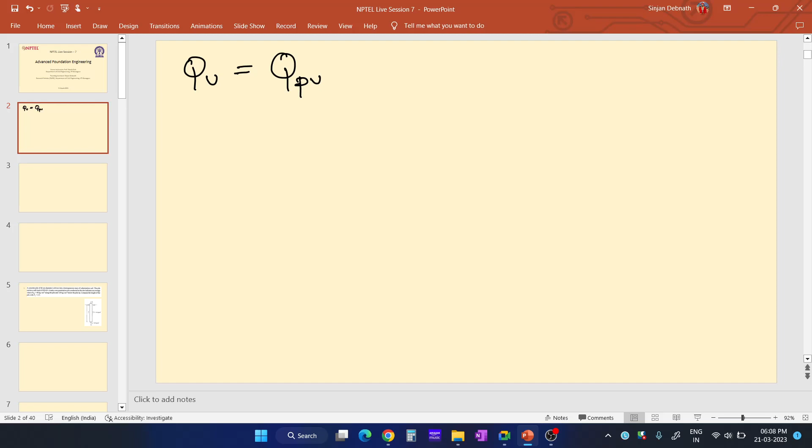So let me go through the concepts that I discussed in the last session, just to refresh your memory. The pile load carrying capacity of the pile, or the ultimate load that the pile can carry, is equal to the end bearing resistance plus the skin friction resistance. This I discussed in the last class, and I solved some problems regarding this concept.

So based upon this concept, what is QPU? It is the end bearing resistance, and QF is the skin friction resistance. QPU is equal to the unit end bearing resistance multiplied by the cross sectional area of the base of the pile, because the end bearing acts at the base of the pile. QF is the total skin friction resistance, which is fs, the unit skin friction resistance acting along the surface of the pile, multiplied by As, the surface area of the pile.

So for cohesive soil, Fs is equal to alpha into C dash. Alpha is the adhesion factor, and C dash is the cohesion of the soil layer along the length of the pile. Suppose this is your pile, this is layer 1, and this is layer 2, with their respective cohesions. This cohesion is the cohesion of that layer along the length of the pile, and this one is Fs.

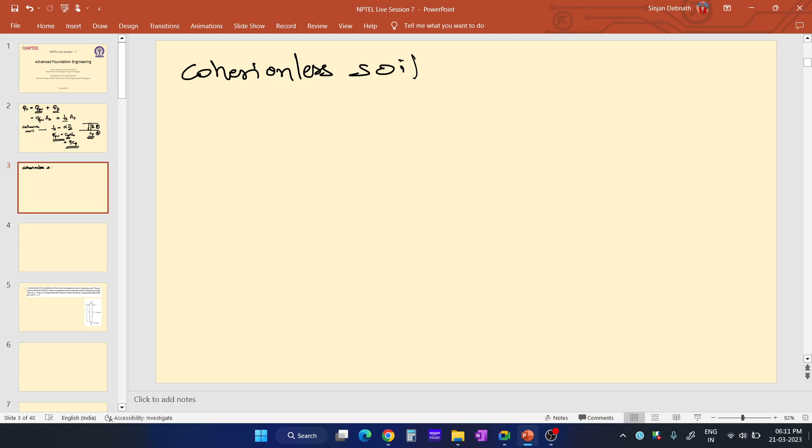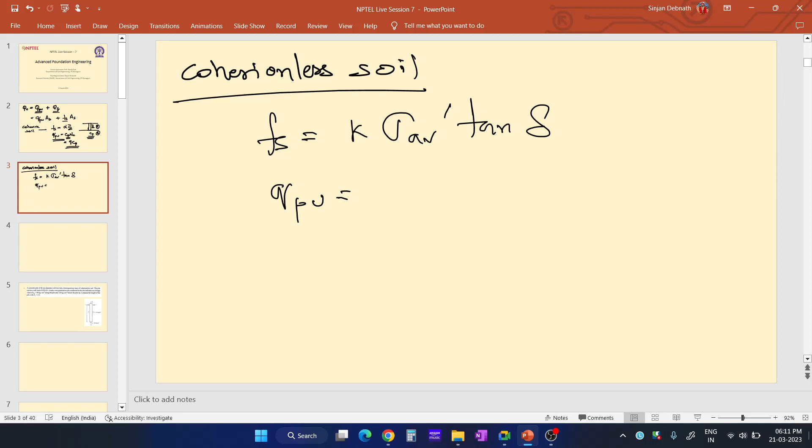And for cohesionless soil, Fs, the unit skin friction resistance, is equal to K into sigma Av dash tan delta. I discussed all this in the last class. And QPU, the unit end bearing resistance, is equal to sigma dash into NQ, where NQ is the bearing capacity factor, and this value should always be less than 11,000 kPa.

Okay, so this is it. Now we may move to the first question. So what is the first question? So the first question is...

A concrete pile of 40 centimeter diameter, as shown in the diagram. The diameter is 40 centimeter. Let me write down all the information given: the pile is driven into a homogeneous mass of cohesionless soil.

The pile carries a safe load of 650 kilonewton. A static cone penetration test conducted at the site indicates an average value of QC of 40 kg per centimeter squared along the pile length, and 120 kg per centimeter squared below the pile tip. So the value of QC is 120 kg per centimeter square at the tip, and QC along the length of the pile is 40 kg per centimeter square.

Compute the length of the pile with factor of safety 2.5. Okay, so we have been asked to find out the length of the pile.

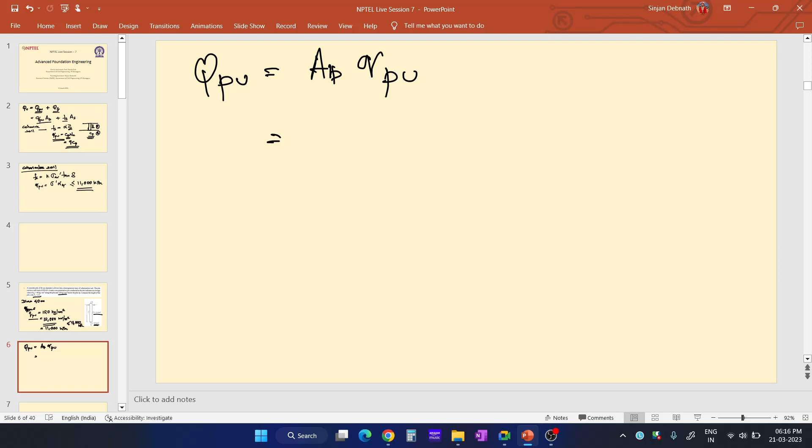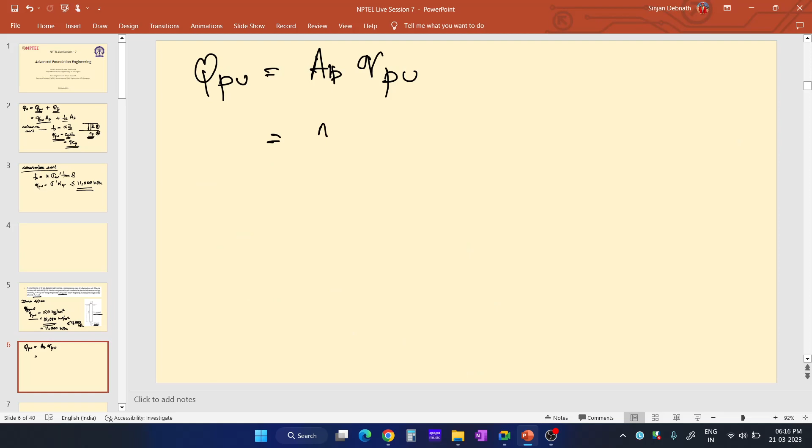We know the diameter of the pile, which is 40 centimeter. So that means the area is pi by 4 into d square, that is 0.4 square, into 11,000.

So small QPU is the unit end bearing resistance, which is 11,000 kPa, and the cross sectional area of the base of the pile is pi by 4 into d square, where d is 0.4. If you calculate this, QPU comes out to be 1382 kilonewton.

Now we have been asked to find out the length of the pile. We don't know the length of the pile; we only know the safe load that the pile is carrying and the factor of safety. So now let us consider the length of the pile to be L.

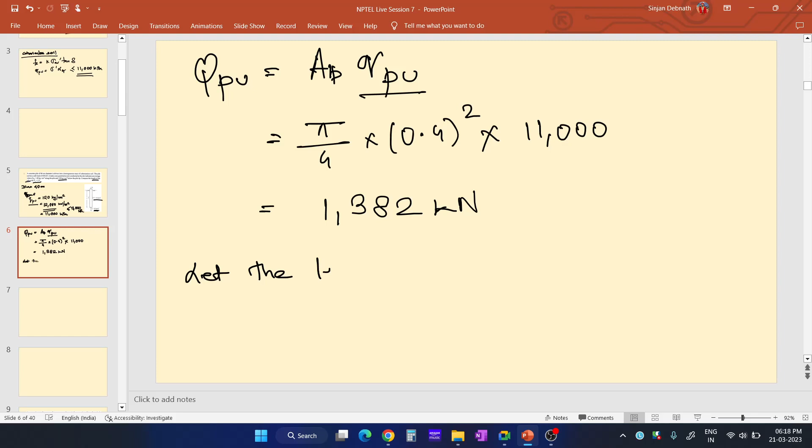Let the length of the pile be L. We don't know the length of the pile, so let us consider it to be capital L. We have found out the total end bearing resistance, and the load carrying capacity of the pile is equal to the summation of total end bearing resistance and total skin friction. So now let us find out the skin friction.

So that is, what is skin friction?

QF, capital QF, is equal to Fs into As. Fs means the unit skin friction resistance, and As is the surface area of the pile. Now let's find Fs.

We know the average value of cone-tip resistance along the length of the pile. The average cone-tip resistance is 40 kg per centimeter square. So Fs will be equal to 40 kg per centimeter square. Now let us convert this value.

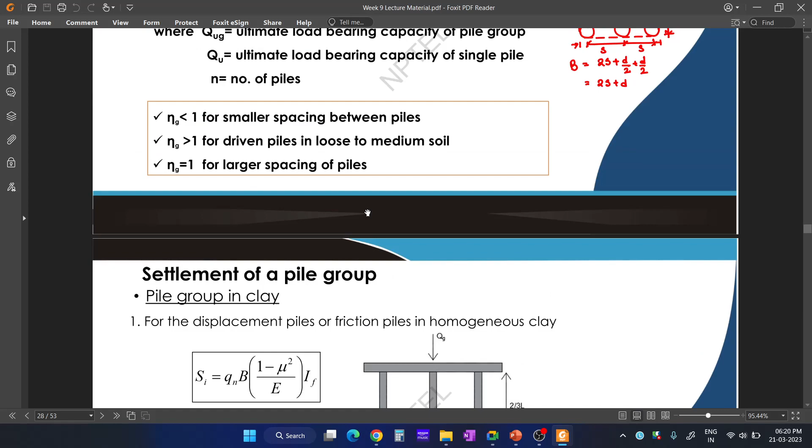Let me refer to a slide. Please wait for a minute.

QF, the total skin friction resistance, is the unit skin friction resistance multiplied by the surface area of the pile. Now, Fs is not exactly 40 kg per centimeter square. Let me explain why. Using QC, for the base, QPU is 120 kg per centimeter square. There is nothing wrong there.

But when finding Fs, the unit skin friction resistance, we need to consider certain things. The average value of QC is 40 kg per centimeter square along the length of the pile, that is, the average cone-tip resistance along the length of the pile.

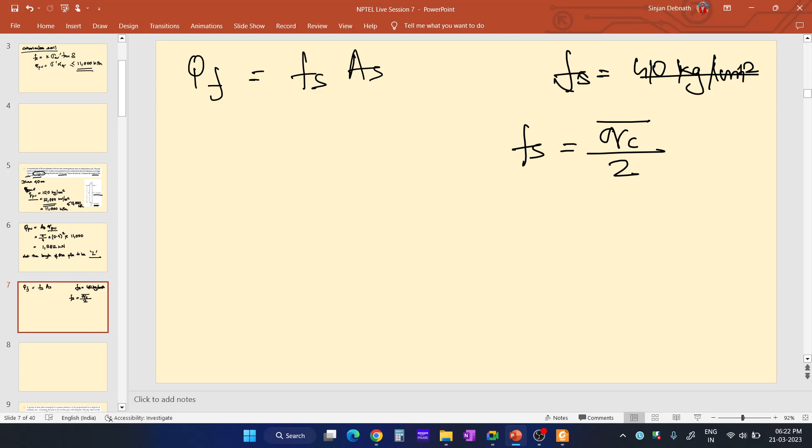Now for a displacement pile, it is mentioned in the lecture that Fs, the unit skin friction resistance, is equal to QC by 2. This QC is the average QC, which is given in the question as 40 kg per centimeter square.

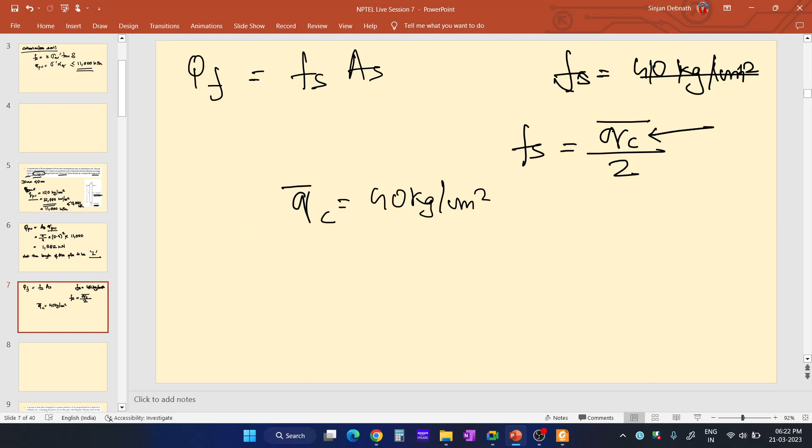The average QC is 40 kg per centimeter square, and the unit of QC is kg per centimeter square. But after calculating, the value you get will be in kilonewton per meter square, or kPa. So QC, 40 kg per centimeter square, divided by 2, gives 20 kPa, that is 20 kilonewton per meter square.

This is an empirical equation. You must not do this for the end bearing resistance. For unit end bearing resistance, QPU is equal to QC, and the unit is also the same, which is why I transformed the unit from kg per centimeter square to kilonewton per meter square. But that is not the case for QF.

Please, while solving such problems, mind this: for Fs, in case of skin friction resistance, Fs equals QC, the average cone-tip resistance, divided by 2. This QC is in kg per centimeter square, and after calculating QC by 2, the resulting value is in kilonewton per meter square. So the value of Fs is 20 kilonewton per meter square. I hope you have understood.

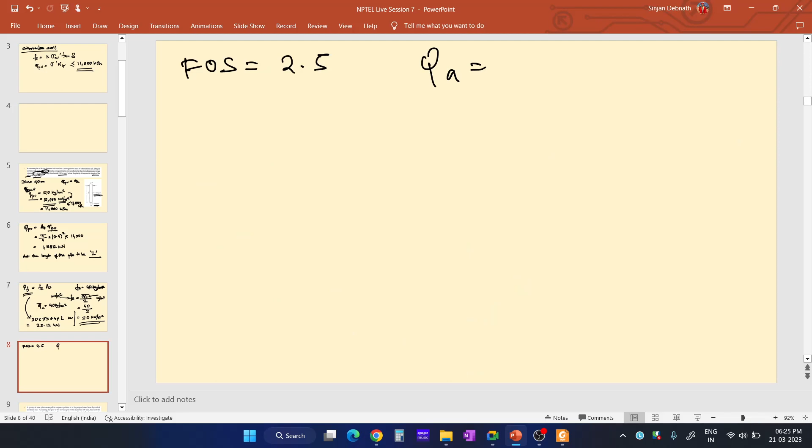Now you know the safe load of the pile is 650 kilonewton, and you also know the factor of safety of the pile, which is 2.5. So factor of safety equals 2.5, and QA, the safe or allowable load, is 650 kilonewton.

So what is the ultimate load that the pile can carry? It is QA into factor of safety, that is 650 multiplied by 2.5. This is the maximum load that the pile can carry.

This one comes out to be 1625 kilonewton. So 1625 kilonewton is the maximum load that this pile can carry. So this one is the maximum load that the pile can carry. Okay, QU, so you know the value of QU.

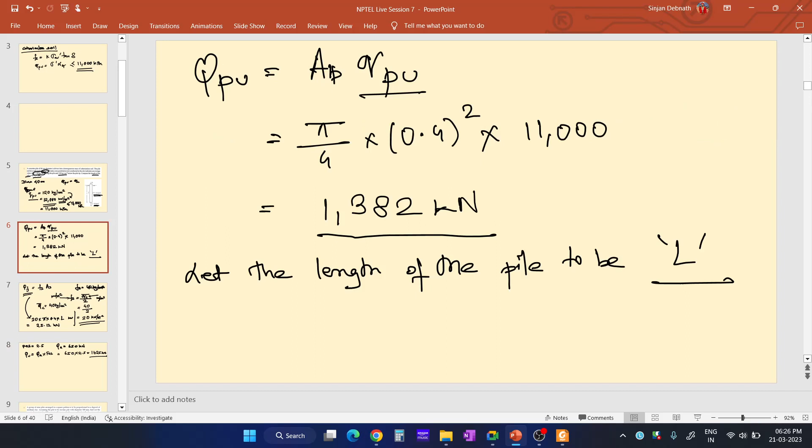You also know the end bearing resistance, total end bearing resistance, that is 1382, and the skin friction resistance, that is 25.12 L. So we can say this QU, the ultimate load or the load carrying capacity of the pile, is equal to the end bearing resistance, that is 1382, plus the total skin friction resistance, that is 25.12 L.

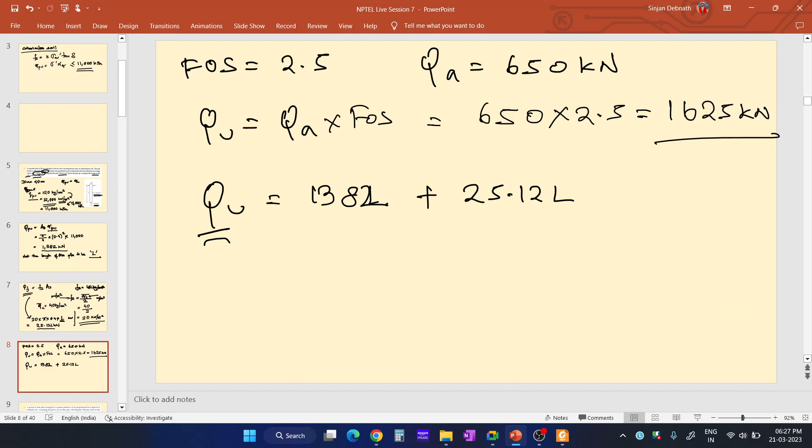And this Q is also equal to 1625 kilonewton. So now let us equate both the things. 1382 plus 25.12 L is equal to 1625 kilonewton. Now if you solve this equation, you will get the value of L to be 10 meter. So this is the answer.

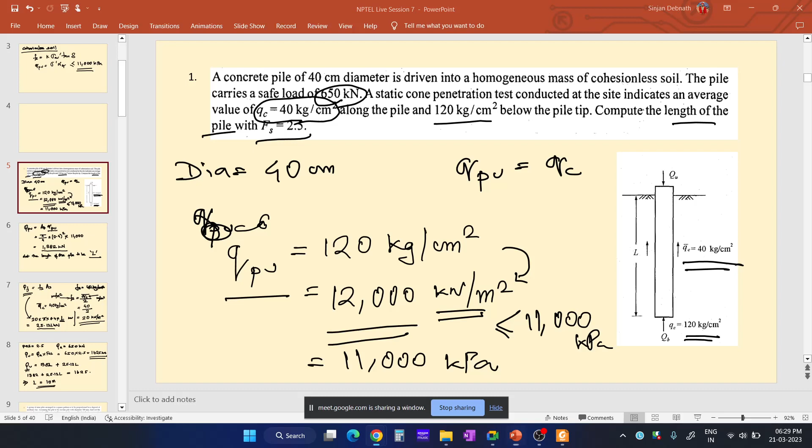Hello, okay, third slide. So are you talking about this slide? So please let me know the doubt. I can't hear you actually. Please... oh, this one, something is wrong over here. Please write your doubt in the chat box.

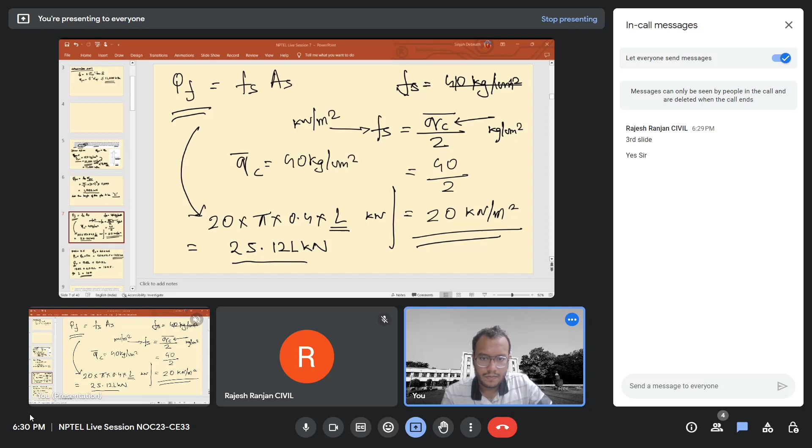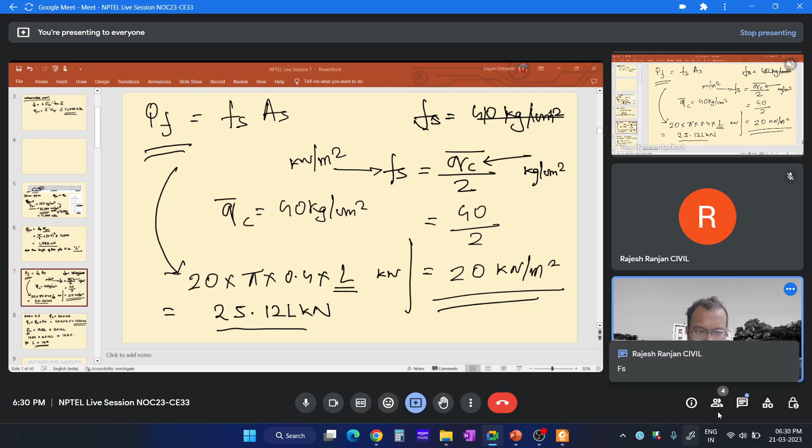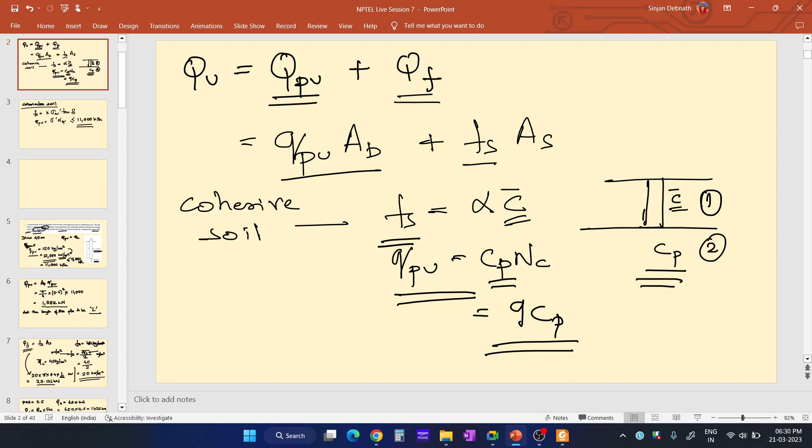Fs is the factor of safety. See, if you multiply the allowable load... oh, this Fs is the unit skin friction resistance. This Fs, or for this cohesionless soil, Fs is the unit skin friction resistance. Okay, so let me just tell you once again, let me explain you a bit.

In this question, it is a cohesionless soil, and a static cone penetration test was conducted at the site. This QC is the average cone tip resistance along the length of the pile, given as 40 kg per centimeter square. And this QC is the cone tip resistance at the base of the pile, meaning the cone tip resistance of the soil at the base, while the other is the average cone tip resistance of the soil along the length.

Now this Fs, the cone unit skin friction resistance, we know the average value of cone tip resistance along the length of the pile is 40 kg per centimeter square. For displacement piles, Fs, the unit friction resistance, is equal to Qc, the average cone tip resistance, divided by 2. So we put QC as it is, 40 kg per centimeter square, but the value we get after dividing QC by 2, that is 40 by 2, will be in kPa, that is kilonewton per meter square.

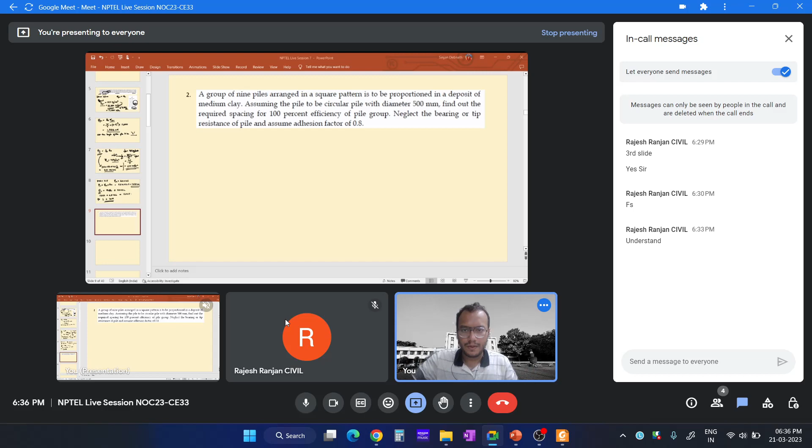Okay, so thanks for waiting. So this is the second question. What is the question? A group of 9 piles arranged in a square pattern is to be proportioned in a deposit of medium clay.

Assuming the pile to be circular with diameter 500 millimeters, find the required spacing for 100% efficiency of the pile group. Neglect the bearing or tip resistance of the pile, and assume an adhesion factor of 0.8.

Let me write down all the information given in the question. Diameter of the pile is 500 millimeters, that is 0.5 meter. The pile group has 100% efficiency. Eta stands for efficiency, which is 100%. And the adhesion factor, alpha, is 0.8.

A group of 9 piles is arranged in a square pattern. So how will it be arranged? There will be 3 piles along the rows and 3 piles along the columns, giving 9 piles total. In this way the piles are arranged in a square pattern, and the spacings are uniform, as obviously they should be for the group to be square.

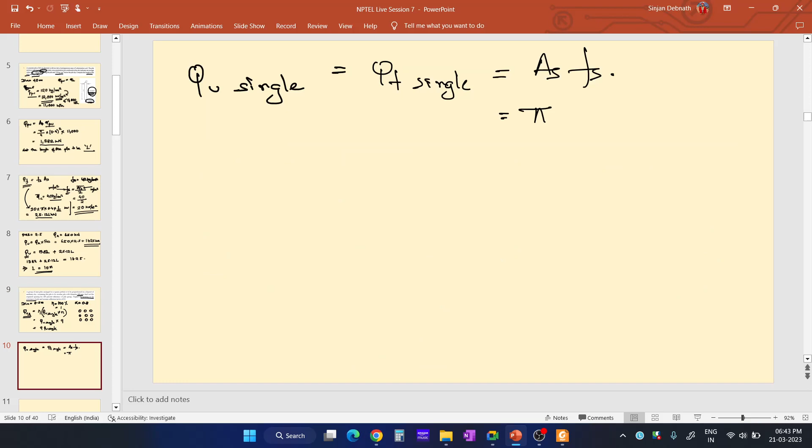So pi into diameter. The diameter of the pile is 0.5 meter, so pi into 0.5 meter into length. What is the length of the pile? The length of the pile is not given, so let us consider the length to be L. So pi d L is the area. And what is the unit resistance?

Unit skin friction resistance is alpha into C. So now, what is QUG?

QUG is the load carrying capacity of the group.

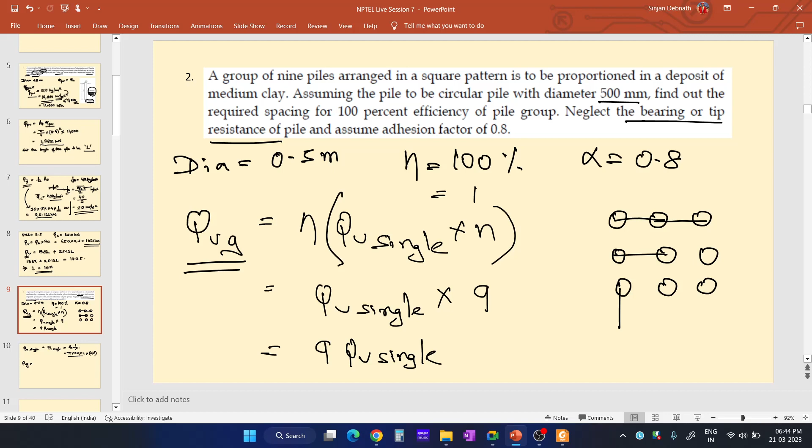Suppose this is the spacing between two piles. Let us consider the spacing to be s. So what will be the length of this group? The length from the outer edge of this pile to the outer edge of this pile, from here to here - what will it be? So this one is s, this one is also s, and this one is half of diameter, and this one is also half of diameter. So that means 2s plus d by 2 plus d by 2.

Let me draw it once again. We need to find out this length along this, and here there will be no space - the circle should touch, the pile should touch over here. So we need to find this total length. We know this is the center to center spacing. This one is s, this one is also s, this one is d by 2, and this one is also d by 2. So the length of a side of this pile group is 2s plus d by 2 plus d by 2, that is 2s plus d, where d is the diameter of the pile.

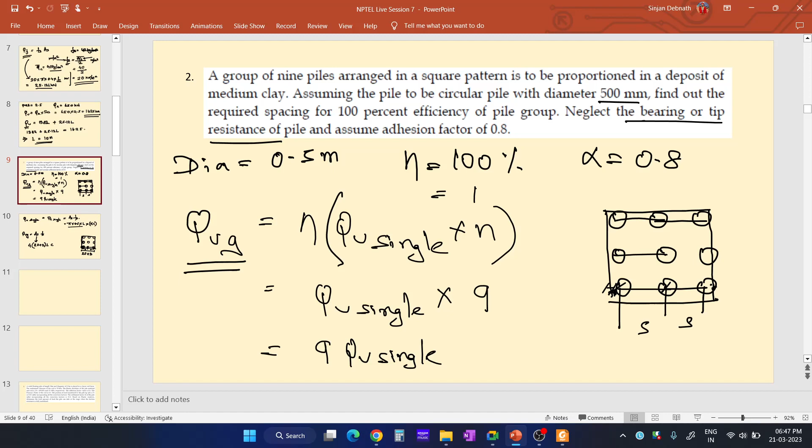Now it is said in the question that the efficiency is 100%, so that means QUG is equal to 9 into QU single. So QUG, what is QUG? It is 4 into 2s plus d, where d is 0.5 meter.

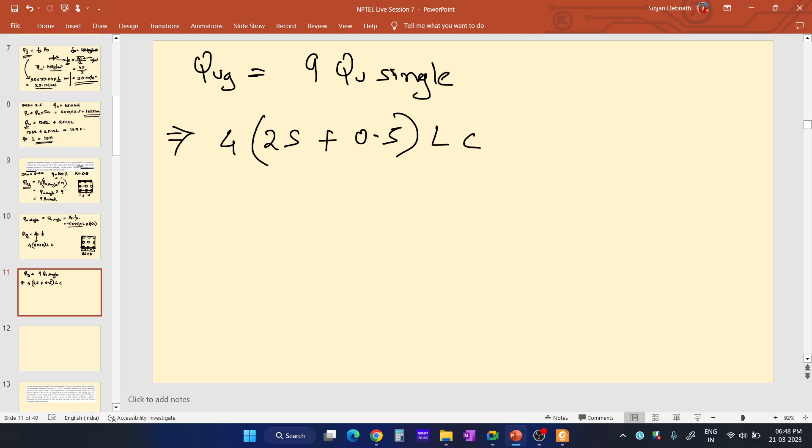So 4 into 2s - we don't know the spacing, center to center spacing - plus d, d is 0.5. We also don't know the value of L, the length of the pile, and we also don't know the cohesion. So let me write it like this: C is the cohesion, L is the length of the pile, and S is the center to center spacing between two piles. And it is equal to 9 into QU single.

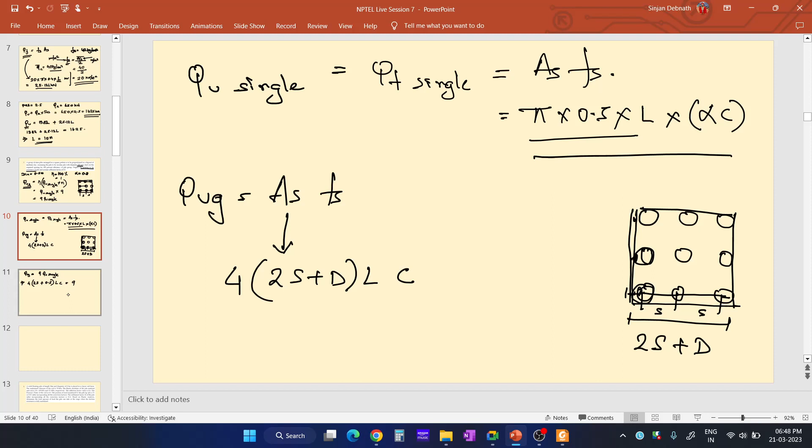So QU single is equal to pi into 0.5 into L, that is AS, times 9, equals pi into d into L into alpha c, where alpha c is the Fs. We know the value of alpha - what is the value of alpha? Value of alpha is 0.8.

Now let me just equate both the two terms. L will get cancelled out, C will also get cancelled out, right? So that means 4 into 2s plus 0.5 is equal to 9 into pi into 0.5 into alpha, where alpha is 0.8. Now if you solve this, only one term is unknown, that is the spacing between two piles.

If you solve this equation, the value of S will come out to be 1163 millimeter, or 1.163 meter. So this is the answer. I hope you have understood this.

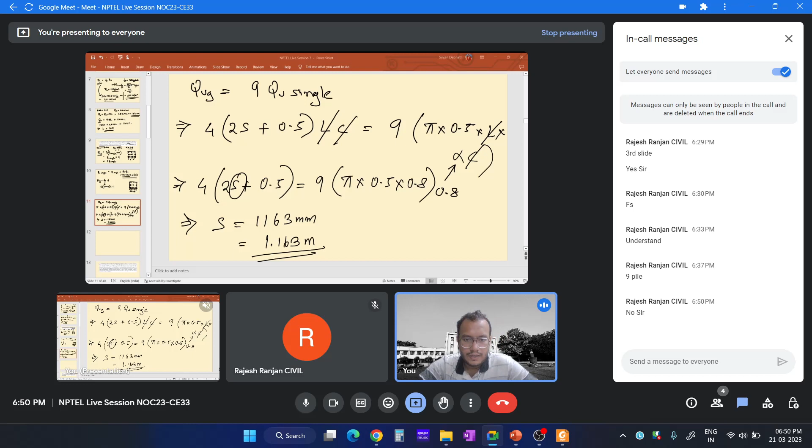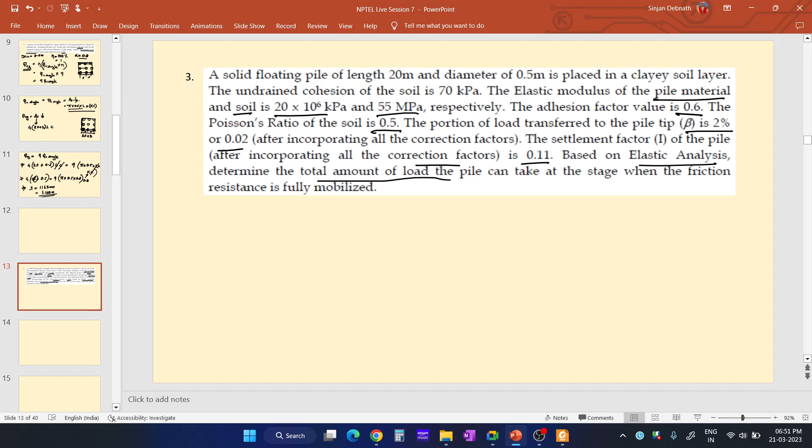The adhesion factor value alpha is given. The Poisson's ratio of soil is also given. The proportion of load transferred to the pile tip is 2% or 0.02 after incorporating all the correction factors. The settlement factor I of the pile after incorporating all the correction factors is 0.11. Based on the elastic analysis, determine the total amount of load the pile can take at the stage when the friction resistance is fully mobilized.

I hope you have watched all the lectures of week 9, where elastic analysis is very well explained. You must know this elastic analysis to solve this problem. So what I will do is brief the lecture here before solving this sum. Let me just brief the concept once before solving this sum.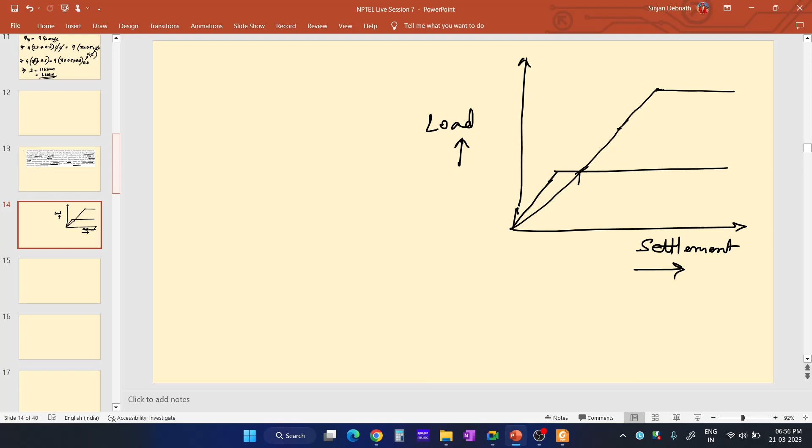Meanwhile, as you are applying the load on top of the pile, the tip resistance, or the end bearing resistance, is also getting mobilized and increasing. At this point, all the skin friction is mobilized, meaning the maximum value of skin friction is reached. But the end bearing resistance will still keep on increasing as you gradually apply more load, up to here, where the maximum value of end bearing resistance is achieved. So now if you sum both these curves, you will get the total load settlement curve of the pile, by combining both curves.

See, at this point, suppose this is Py1, the axial load that we are applying. So at this point of time, we are just combining both the curves, we are adding both the curves. After adding this curve and this curve, we get this resulting curve.

So what is happening is that as you are applying the load on top of the pile, this skin friction is increasing linearly, gradually. After a certain point of time, this skin friction is completely mobilized. And meanwhile, this end bearing resistance is also increasing.

And over here, when the axial load is at this point, this curve is the combination of both curves. This one is the curve for end bearing resistance, this one is the curve for skin friction. If you combine both curves, you get the total load carrying capacity, the total load settlement curve of the pile. So at this point, end bearing resistance is completely mobilized, and the curve becomes flat.

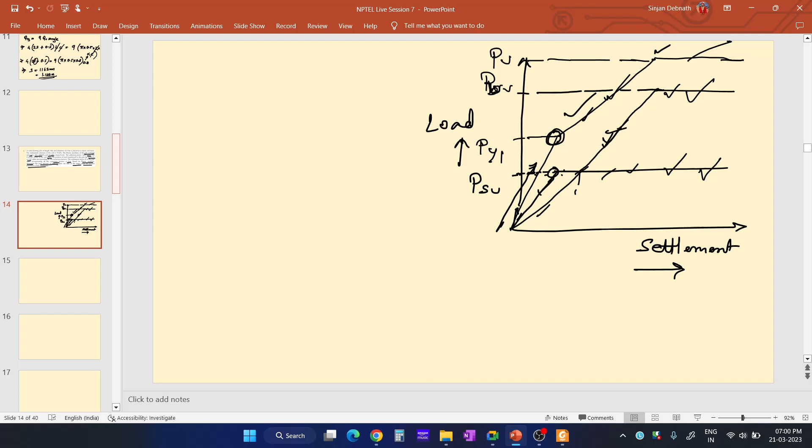So we need to find Py1. At this point, skin friction was completely mobilized, and end bearing resistance was increasing. So corresponding to this point, this one is the combination, the summation of end bearing plus skin friction. This one is skin friction only, this one is only end bearing. This one is the summation of both.

We need the summation of both, meaning the original load that the pile was carrying. So we have been asked to determine the total amount of load the pile can take at the stage when friction resistance is fully mobilized. At this point, the skin friction was completely mobilized, so we need to find Py1.

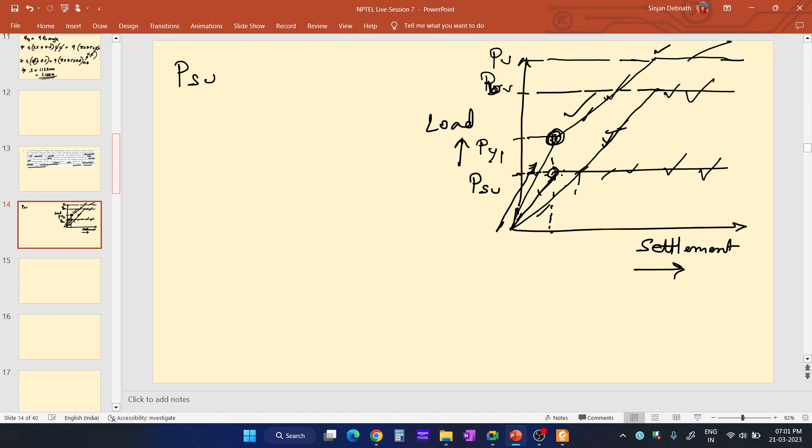So what is the maximum value of skin friction resistance? That is PSU. What is the value of PSU? It is AS into Fs. What is Fs? Fs is alpha C, right?

So what is the surface area of the pile? We know the length of the pile, we know the diameter of the pile. That means it is pi into d into L. What is the length of the pile? It is 20 meters.

20 meters. And what is alpha of the pile? Alpha is 0.6. And what is the value of C, the cohesion? What is the value of cohesion?

The undrained cohesion of soil is 70 kPa, as given. This is the maximum skin friction resistance. After calculating this, we will get the value of PSU, which is equal to 1320 kilonewton.

Now, the portion of load transferred to the pile tip is 2%. Suppose you are applying a load P on the top of the pile. So 2% of that load is getting transferred through the pile tip to the soil underneath the pile. So that means 2% of P is getting transferred through the pile tip. So how much is getting transferred to the skin friction?

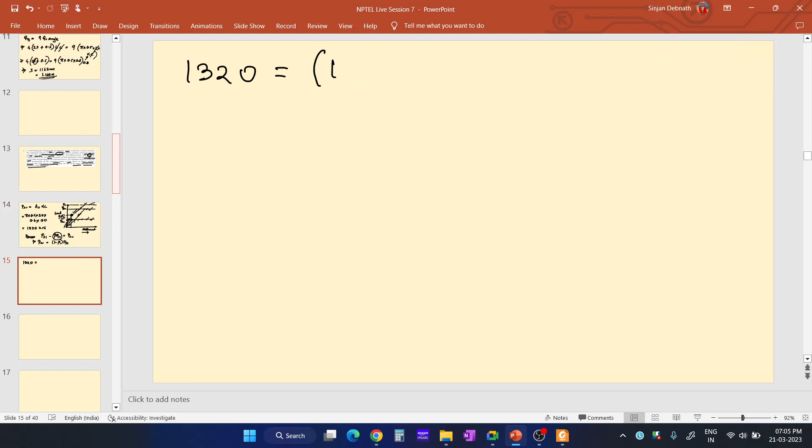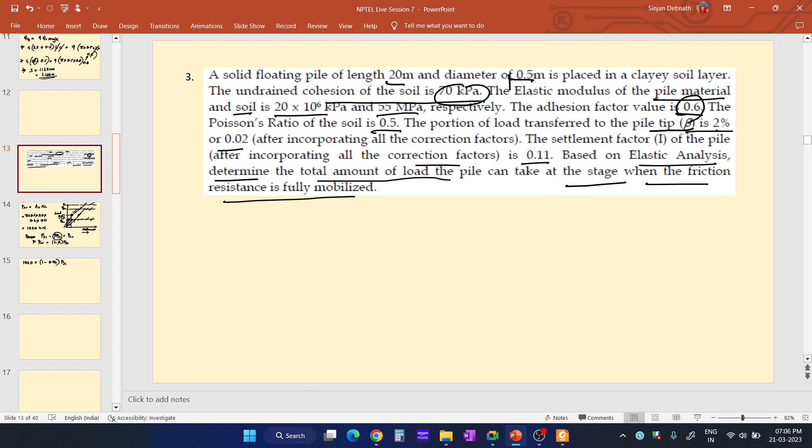So we know the value of PSU, which is 1320 kilonewton. So 1320 kilonewton is equal to 1 minus beta, so 1 minus 2%, that is 0.02. And how much is Py1? We don't know - we actually need to find that. So we need to find out the total amount of load the pile can take at the stage when friction resistance is fully mobilized. So we need to find out this.

So this one: 1320 is equal to 1 minus 0.02 into Py1. We need to find out this. Py1 is the total amount of load that the pile can take at the stage when the friction resistance is fully mobilized. Now, if you solve this, you will get the value of Py1. Py1 will be equal to, if you solve this equation, it will come out to be 1347 kilonewton.

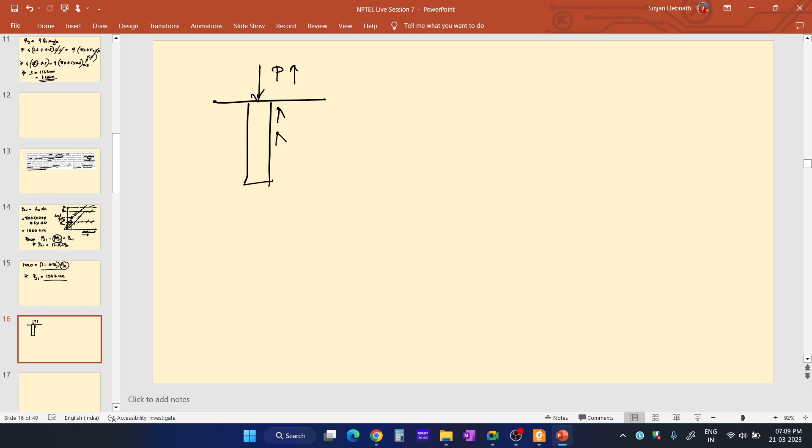Initially, the load will get carried out by skin friction. Skin friction will increase rapidly - Fs will increase rapidly. And this base resistance, that is the end bearing resistance, qb, will also increase, but gradually.

Qp will increase gradually, like this. Suppose this is the load settlement curve of this pile. Let me divide this into two parts: one for the shaft settlement, and another curve for the tip settlement.

Initially, this skin friction will increase rapidly as you increase this value of P. Initially the load will get carried by the skin friction. After a certain point of time, the skin friction will reach its maximum value and it will get constant.

Meanwhile, the end bearing resistance will also increase parallelly as you increase this value of P. Initially it will increase very slowly, and after that it will carry maximum load. Some load is carried by the skin friction, and maximum load is carried by the end bearing. After a certain point, when the maximum capacity is reached, end bearing resistance will also get constant. So this one is the load settlement curve of the shaft, and this one is the load settlement curve of the tip.

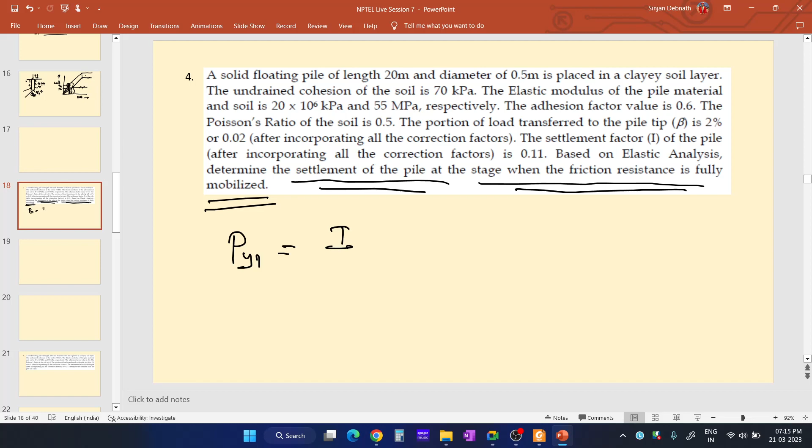So the equation is Py1 equals I, the influence factor, divided by Es into D. Es is the Young's modulus, or modulus of elasticity, of the soil, and D is the diameter of the pile. PSU, we know what is PSU, it is the ultimate skin friction resistance, divided by 1 minus beta.

Now let us put the values of all the parameters into this equation. I is the settlement factor of the pile, it is 0.11. Es is the elastic modulus of the soil, it is 55 MPa, meaning 55 into 10 to the power 3 kPa. D is the diameter of the pile, it is 0.5 meter. PSU we have already found out.

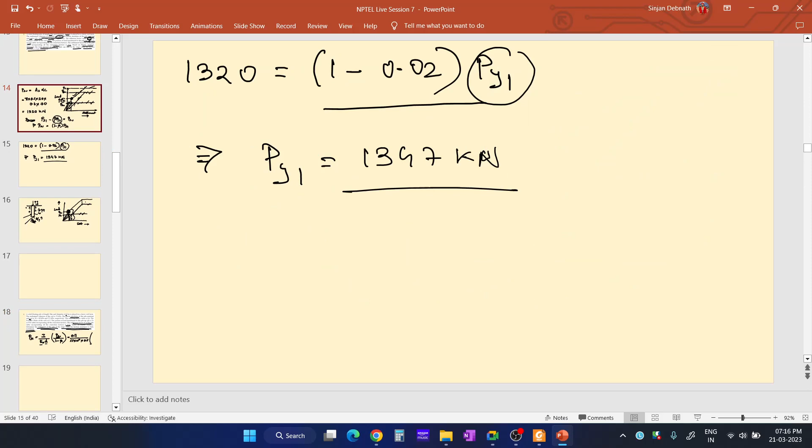So PSU we have found out. PSU is this 1320 kilonewton. So PSU is 1320 kilonewton divided by 1 minus beta. What is beta? Beta is 0.02 or 2%. So 1 minus 0.02.

There is the equation. I have just incorporated the values of all the parameters into the equation and solved the equation. So this is a very simple sum. I hope you have understood this.

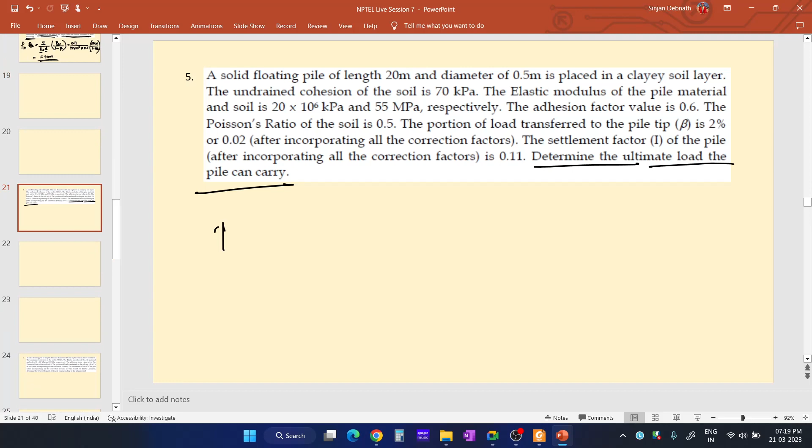We have already found out the maximum skin friction resistance. What is the maximum skin friction resistance? It is 1320 kilonewton, right? That is at this point, this is the maximum skin friction resistance. So PSU is how much? PSU is 1320 kilonewton. So PSU is the maximum skin friction resistance, or the ultimate skin friction resistance. It is 1320 kilonewton.

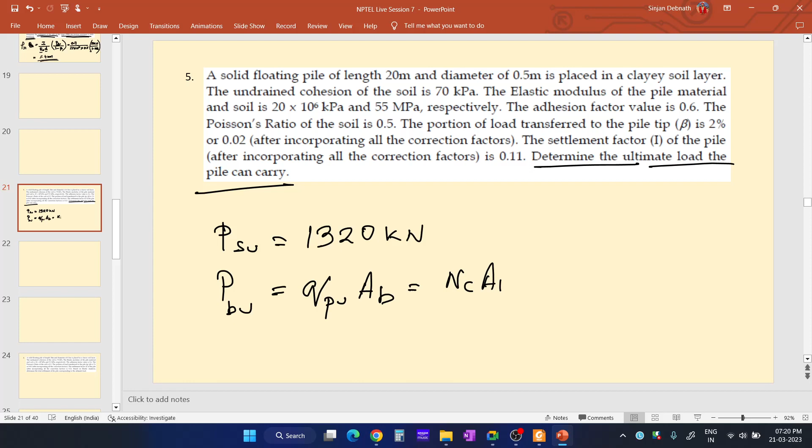Now you need to find out the maximum end bearing resistance. So what is the maximum end bearing resistance? That is PBU, maximum end bearing resistance or the ultimate end bearing resistance. For clay soil, it is actually QPU into AB, right? And for clay soil, it is NC AB equal to 9 into C into AB, right?

So 9 into C, what is the value of cohesion? It is given, cohesion of the soil is 70 kPa. So 9 into 70 into AB. What is the cross-sectional area of the pile? If the diameter is 0.5 meter, then AB is pi by 4 into d square, that is 0.5 square. If you solve this, you will get the value of PBU, that is the end bearing resistance, total end bearing resistance. It will come out to be 124 kilonewton.

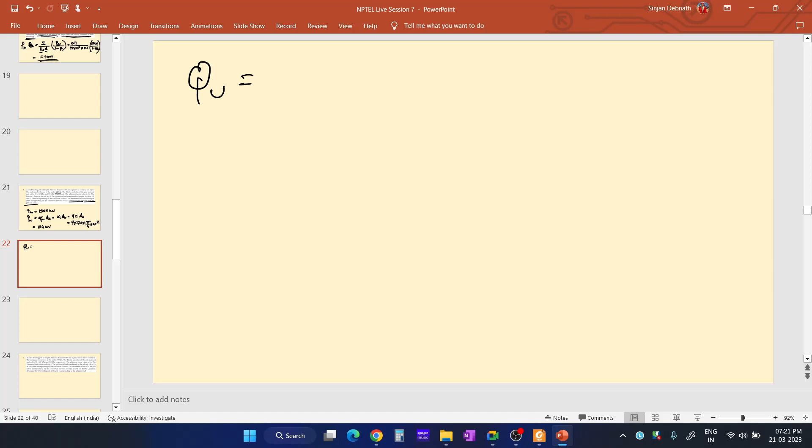So the ultimate load that the pile can carry, it is QU. Suppose if it is QU or PU, both are same. It is PSU plus PBU, which is 1320 plus 124 kilonewton. So it will come out to be 1444 kilonewton. So this is the maximum load that the pile can carry. Please let me know if you have any doubt in this question.

Okay, can you see the slide now?

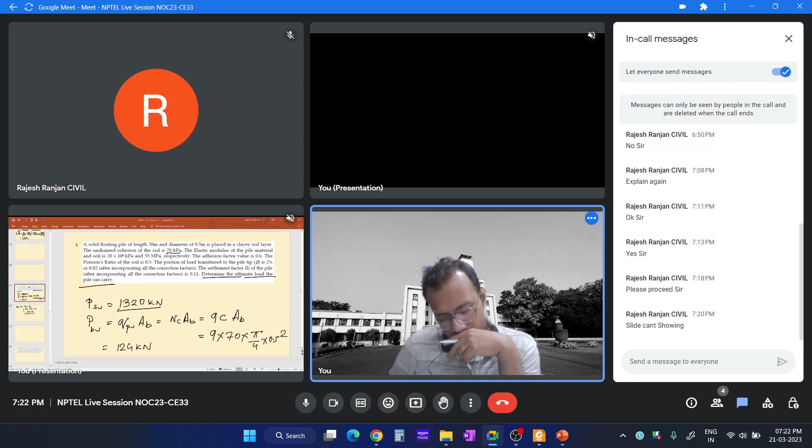So have you understood this problem? Can you see the slide now? Please go through this problem once.

Let me explain it once again what I have done. Here we have been asked to find out the ultimate load that the pile can carry. The information is similar to that of the previous problems. We know the ultimate friction. So what is the ultimate load that the pile can carry? Ultimate load is equal to the total skin friction resistance and the total end bearing resistance, summation of both the terms. And total skin friction resistance, we have found out PSU in the earlier problem.

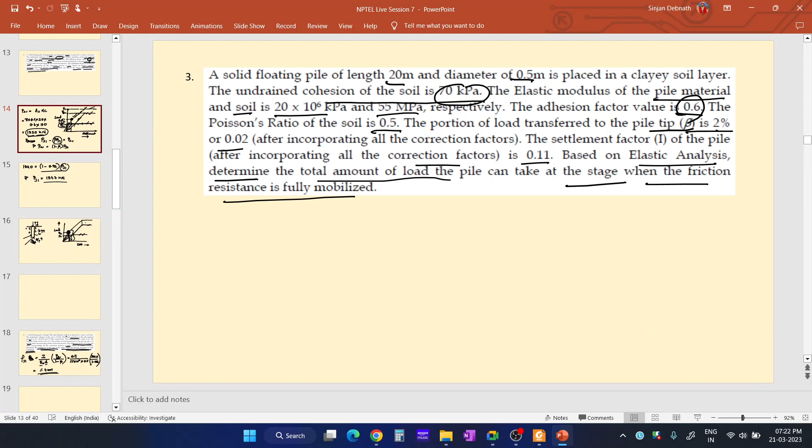It is 1320 kilonewton, like this. PSU is AS into FS, FS is alpha C, so it is 1320 kilonewton. The frictional part is 1320 kilonewton, skin friction resistance, ultimate skin friction resistance, and ultimate end bearing resistance is 124 kilonewton, that is QPU into AB. It is equal to 9C into AB, the ultimate end bearing resistance. If you calculate this, it comes out to be 124 kilonewton.

And if you just add both the terms, you will get the total ultimate load, which is 1444 kilonewton. So please let me know if you have understood this or not.

It's not showing. Can you see the slide now? Wait a minute.

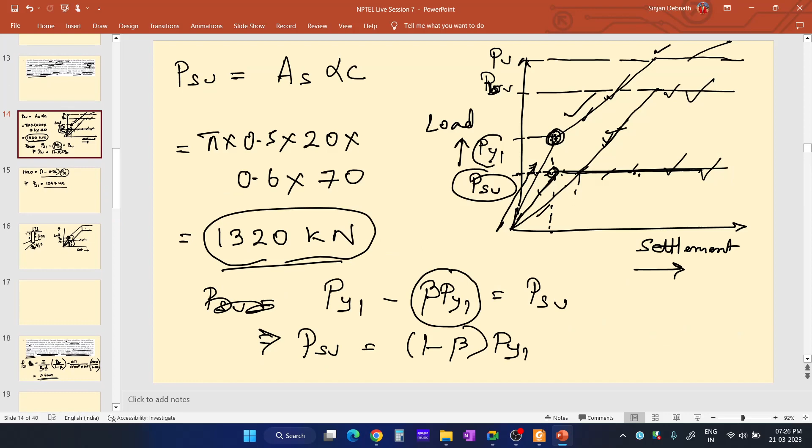And this PBU is the maximum end bearing resistance. What is end bearing resistance? PBU is unit end bearing resistance into AB, that is the cross section of the base of the pile. It is equal to NC into AB. NC is the bearing capacity factor, and NC is equal to 9. So PBU is equal to 9C into AB.

We did a similar type of problem earlier also. If you see the value of C, it is 70 kPa. If you put all the values of all the parameters into this equation, you will get the value of PBU. AB is the cross sectional area of the pile. If the diameter is 0.5, the area of the base of the pile is pi by 4 into d square, that is 0.5 square. If you solve this, you will get the value of PBU, which is 124 kilonewton.

Now if you add both terms, that is the ultimate skin friction resistance and the ultimate end bearing resistance, you will get the maximum ultimate load of the pile, which is the maximum load the pile can carry.

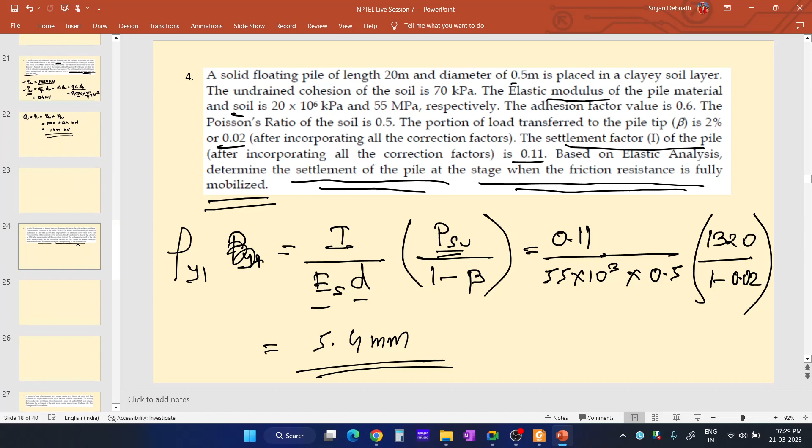In the next question, the data given is similar to the previous questions, but here we have been asked to determine the total settlement of the pile corresponding to the ultimate load. In the last question, we were asked to determine the ultimate load the pile can carry, and in the question before that, we were asked to find the settlement of the pile at the stage when the frictional resistance is fully mobilized. Here, we need to find the total settlement of the pile corresponding to the ultimate load.

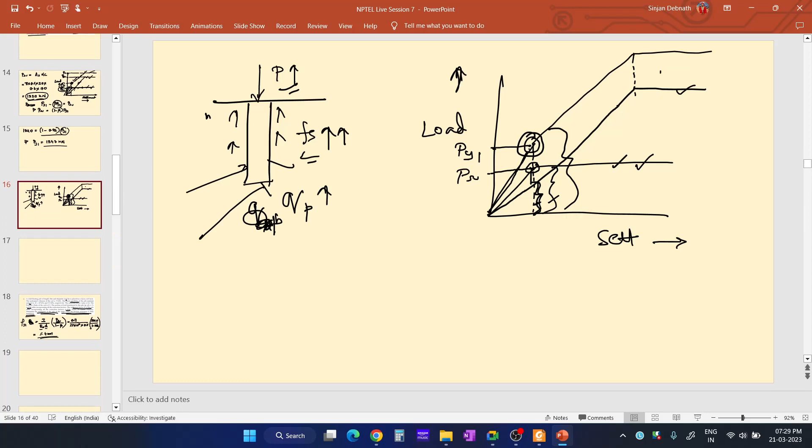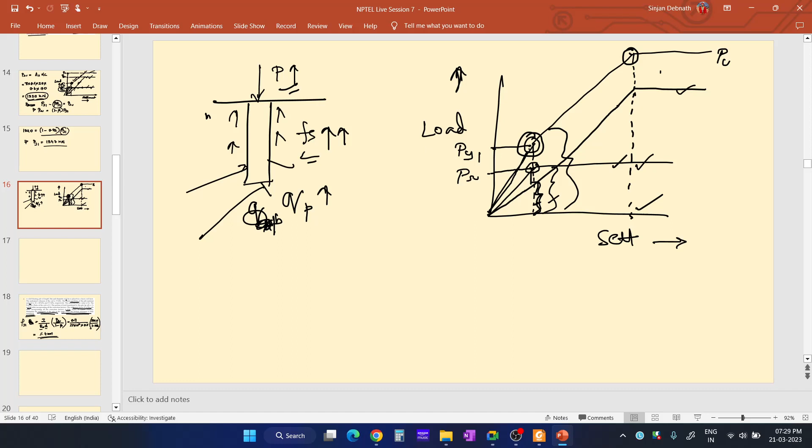Let me look at the graph. We need to find this settlement at the ultimate load. This is the ultimate load that the pile can carry, the value of Pu. So we need to find the settlement corresponding to Pu.

For that there is an equation, so let me write it down. Rho u is the settlement corresponding to the ultimate load. Rho u is equal to I, the influence factor, divided by Es, the modulus of elasticity of soil, into diameter of the pile, into PBU, the ultimate end bearing resistance, divided by beta, that is the portion of load transferred to the pile tip, plus PBU minus PSU, the ultimate skin friction resistance, divided by 1 minus beta, into beta into L by AP EP.

Okay, so we know the value of I, the settlement factor. We know the value of ES, the elastic modulus of pile and soil - this is the elastic modulus of the pile, and this is the elastic modulus of soil. We know the diameter of pile - this is the diameter of pile.

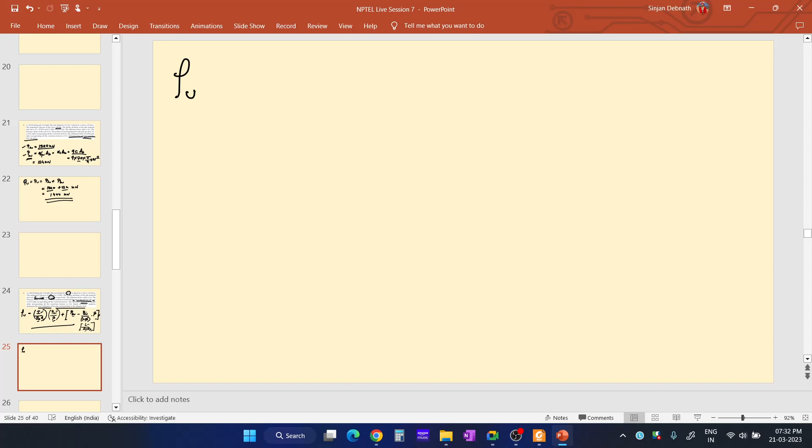So now let us incorporate the values of all the parameters into this equation and solve it. Rho u, the settlement corresponding to the ultimate load Pu, is equal to I by ES D. I is 0.11. What is the value of ES? It is 55 kPa, 55 MPa, that is 55 into 10 to the power 3 kPa. And D, the diameter of the pile, is 0.5.

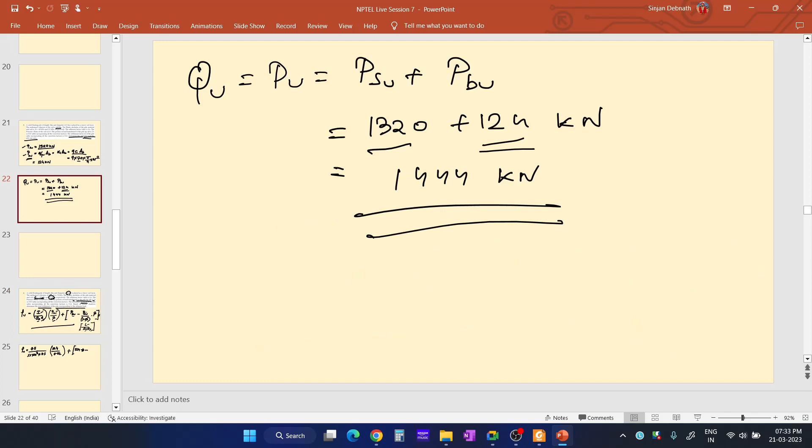Now this term, PBU by beta. What is PBU? PBU is 124 kilonewton. Beta is 0.02. Plus PBU, which is 124, minus PSU. PSU is the ultimate skin friction resistance, it is 1320 kilonewton, divided by 1 minus beta. So 1 minus beta means 1 minus 0.02, into beta. How much is beta? Beta is 0.02.

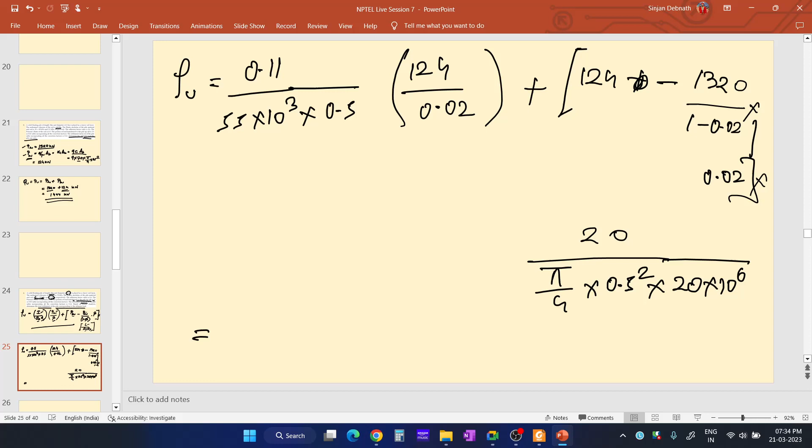And this L by AP EP. What is L? Length of the pile is 20 meter. AP is the cross sectional area of the pile. If the diameter is 0.5, AP will be pi by 4 into d square, that is 0.5 square. EP, the Young's modulus of pile, is 20 into 10 to the power 6 kPa. So now if you solve this, you will get the value of settlement corresponding to the ultimate load - it will be equal to 25.3 mm.

So please let me know if you have understood this problem or not. Please let me know in the chat box. We have just solved a simple equation after incorporating the values of all the parameters that we have determined. This is the equation. Please let me know if you have any doubt in this problem. Just go through the equation once and please let me know if you have any doubt. Please let me know if you have any doubt in this question, or else I will proceed to the next question.

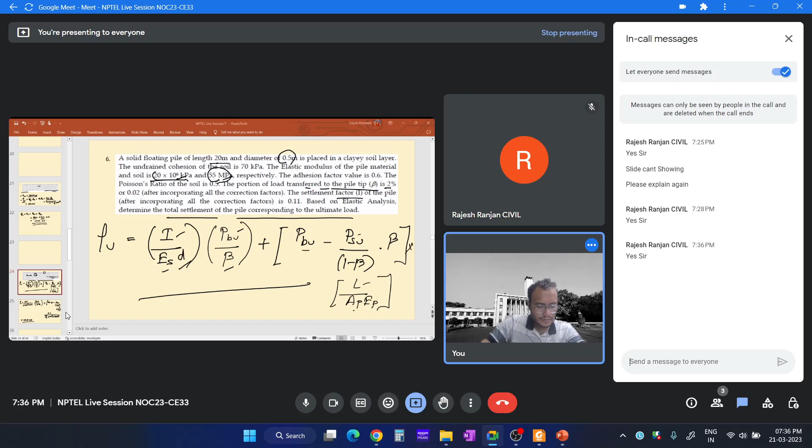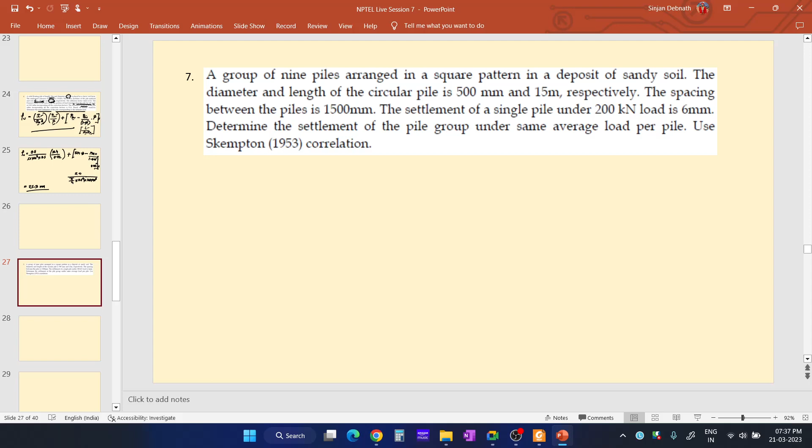Okay, so now I will proceed to the next question. A group of 9 piles arranged in a square pattern in a deposit of sandy soil. The diameter and length of the circular pile is 500 millimeter and 15 meter respectively - this is the diameter of the pile, this is the length of the pile. The spacing between the piles is 1.5 meter or 1500 millimeter. The settlement of a single pile under 200 kilonewton load is 6 mm. Determine the settlement of the pile group under the same average load per pile. Use Skempton 1953 correlation.

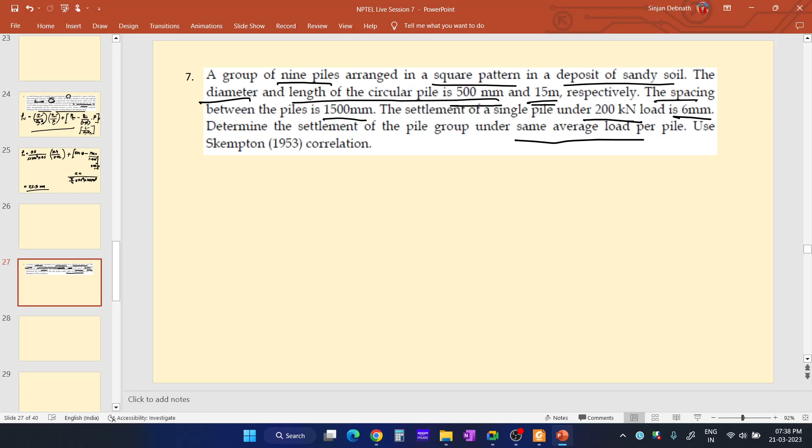So here in the question it is said that a group of 9 piles arranged in a square pattern in a deposit of sandy soil. The diameter and length of each pile is given - the diameter is 500 millimeter and length is 15 meter. The spacing between the piles is also given, it is 1.5 meter. And the settlement of a single pile, if we consider a single pile, is 6 millimeter under 200 kilonewton load. So now we need to find out the settlement of the total pile group under the same average load per pile, that is 200 kilonewton per pile. We need to use Skempton 1953 correlation. So before solving this sum, let me write down the Skempton equation once.

Skempton 1953 correlation. Suppose for the same average load per pile, the settlement ratio of group of piles to the single pile is needed. We have been asked to find the settlement of the pile group. Suppose SG is the settlement of the pile group and SI is the settlement of a single pile. Skempton has given an equation: SG by SI is equal to 4 into B plus 2.7, divided by B plus 3.6, square.

What is B? B is the width of the pile group, in meters. In the question it is said that a group of 9 piles is arranged in a square pattern, like this.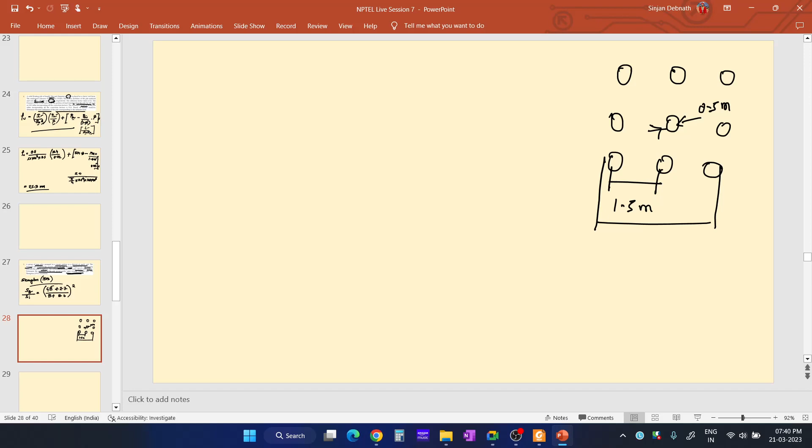Diameter of the pile is given as 500 mm, or 0.5 meter, and the spacing between two piles is 1500 millimeter, that is 1.5 meter. So what will be the width of this pile group? This spacing is S. So the width of the pile group is 2S plus D by 2 plus D by 2.

This is B. So 2S means 2 into S. What is the value of S? The spacing between two piles is 1.5 meter. So B equals 2 into 1.5 plus D by 2 plus D by 2. What is the value of D? It is 0.5 meter, the diameter is 0.5 meter. So D by 2 plus D by 2 means D.

So that means B equals 2 into 1.5 plus 0.5. D plus D by 2 plus D by 2 means D, and D is 0.5. So 2 into S means 2 into 1.5 plus 0.5. If you calculate this, you get B equal to 3.5 meter.

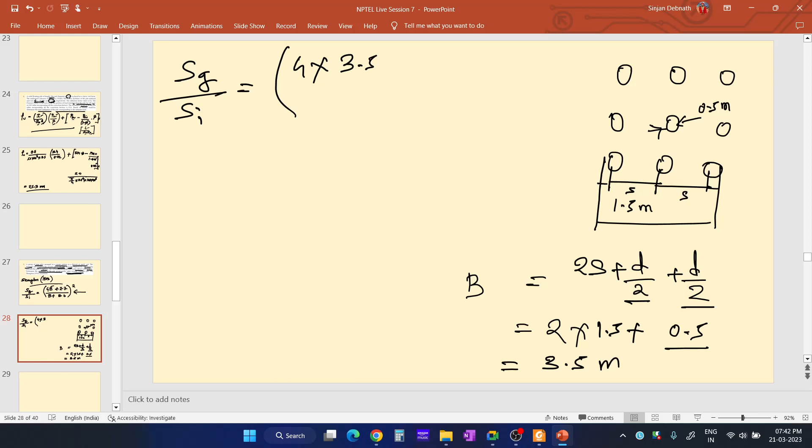Now let us put B equal to 3.5 into this equation. So SG by SI is equal to, what is the equation? 4B plus 2.7 divided by B plus 3.6, square. So 4 into how much? 3.5 plus 2.7. We must note that B should be in meters, since it is an empirical equation. So B is 3.5. So 4 into 3.5 plus 2.7, divided by B plus 3.6.

So 3.5 plus 3.6, square. If you calculate this, you get SG by SI, it comes out to be 5.53. It is a ratio, SG by SI is a ratio.

Now, in the question it is mentioned that the settlement of a single pile under 200 kilonewton load is 6 mm. So now SG is equal to 5.53 into SI, and SI, the settlement of a single pile, is 6 millimeter. So SG, the settlement of the pile group, is equal to 5.53 into 6. If you calculate this, SG comes out to be 33.2 millimeter.